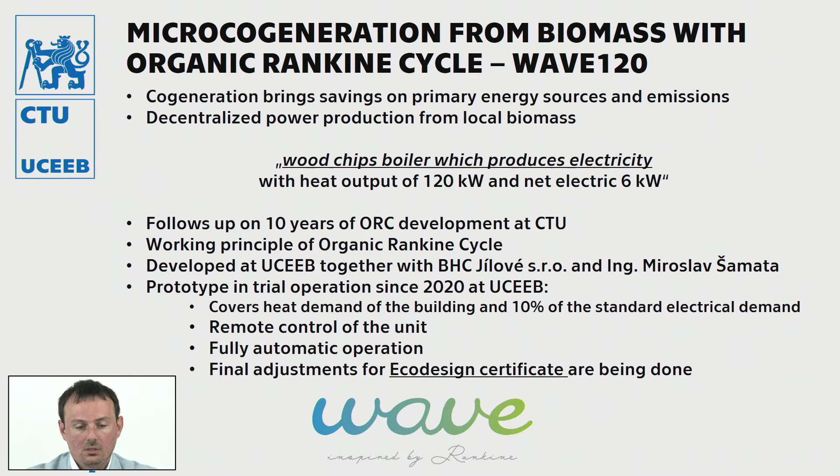What is organic Rankine cycle and why we chose WAVE? Organic Rankine cycle is one of the thermodynamic cycles. It's the way how to transfer the heat into mechanical work, and then transform into electricity. William John Macquorn Rankine was a Scottish engineer. He lived in the 19th century, and he was one of co-founders of thermodynamics as a scientific area. He was also a mathematician, and he was focused on sea wave behavior and description. So we gave the WAVE label to our unit to thank him and to be clear that we were inspired by him.

And the process loop is quite simple. You can see that we put fuel, as I've mentioned we use biomass, into the combustion chamber, and we then use flue gases to heat, to evaporate and superheat our working fluid. Then we transform some specific part of the heat into mechanical energy and then into electricity, and the rest is flowing into the condenser, and we produce heat. After condensation, the working fluid is received and fed back, and the loop is then closed. Cogeneration or combined heat and power production means that these two types of energy are produced together.

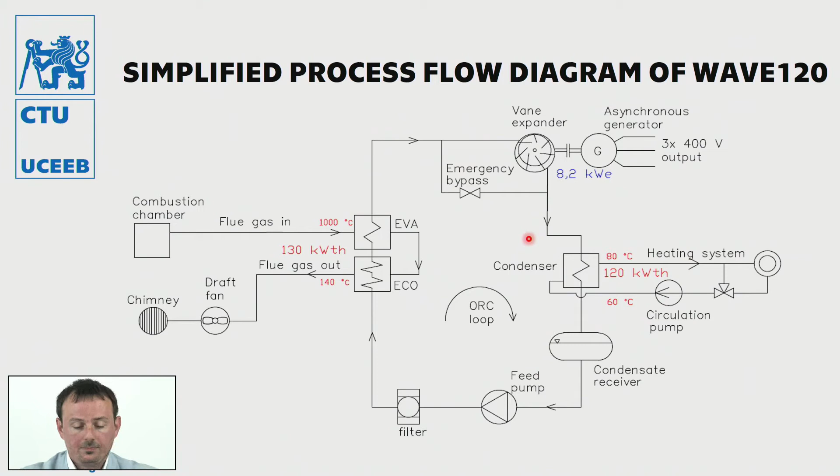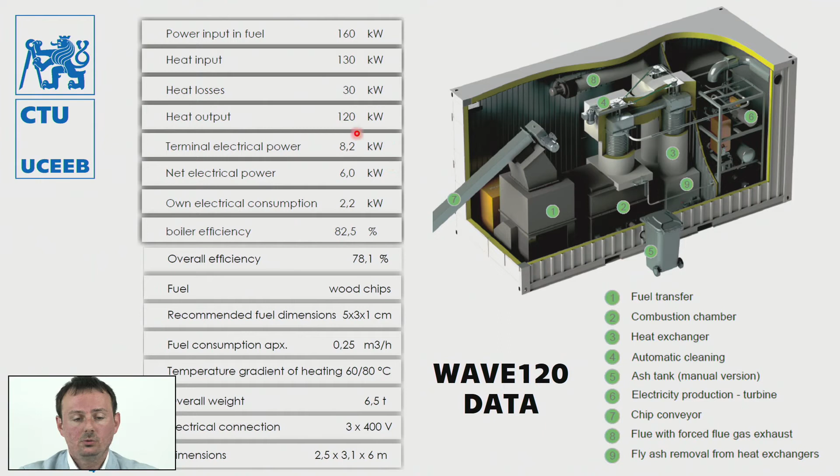Here you can see parameters of the near market unit. The technology is placed into a standard ISO container. On the left side you can see biomass storage and burning chamber and the heat exchangers, and these components are quite comparable to our competitors. But on the right side there is something we call the engine room, and this is the core of the unit where we are able to produce both electricity and heat. So this is the difference between standard technology and what we add to it. When we look at parameters, standard technology has consumption of electricity, and we are producing electricity compared to the competitors. This is possible only with in-house developed components. The core of the unit is electricity generating.

We use a rotary vane expander. I'm very proud of this part of the technology. Václav Hodička, a colleague who is responsible for more than 10 years of research and development in this field, is one of maybe 5 people around the globe who are able to design and operate this type of technology in ORC. And the requirement was to follow simple construction and to be able to achieve nearly maintenance-free operation.

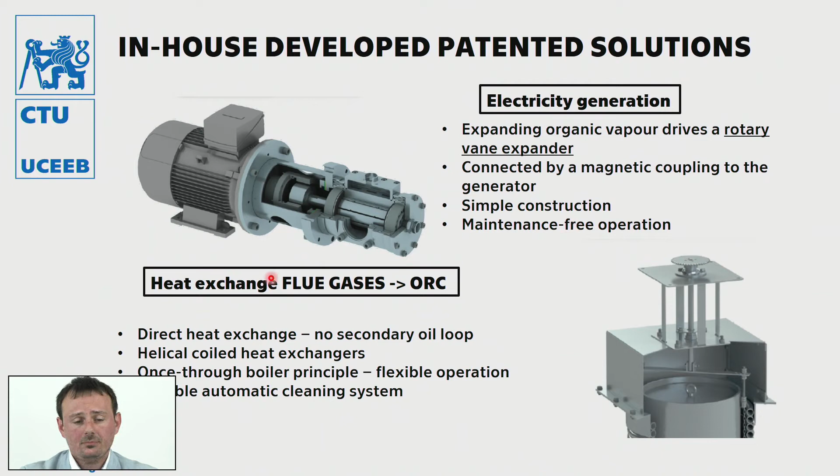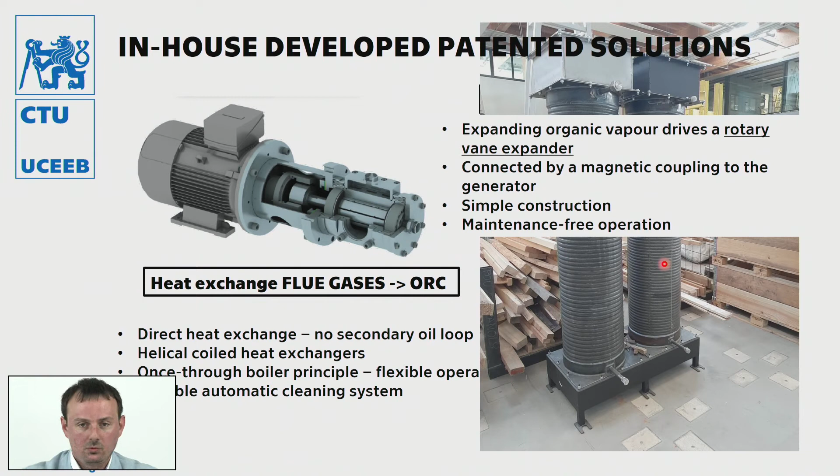In terms of heat exchangers, now you maybe see what those tubes in the UCEEB hall are for, as we can see here on the picture. These tubes are used for transferring heat from flue gases into the working fluid. Specific to our technology, and it's quite extraordinary, is that we use direct heat exchange. Only a few producers around the world are working with this direct transfer from flue gases into the working fluid. Usually they use an oil loop to separate those loops.

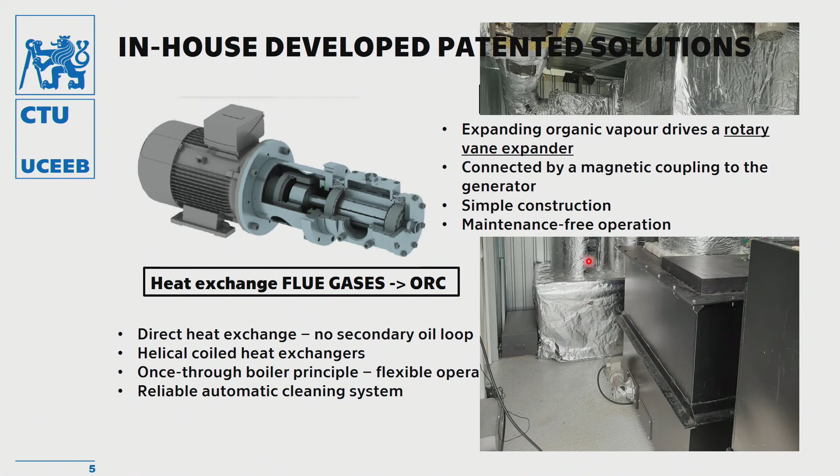Now you can see the picture of the real unit. You can see the combustion chamber and the bottom of the heat exchangers here. Almost all parts of the technology have their own ongoing development projects. In terms of the combustion chamber, the technology is based on 25 years of experience of our business partner, but still we have to improve the technology to achieve new requirements, especially from the air pollution area. And we are improving the technology to be able to use especially low quality biomass. There's a quite strong request from the industry for these types of solutions.

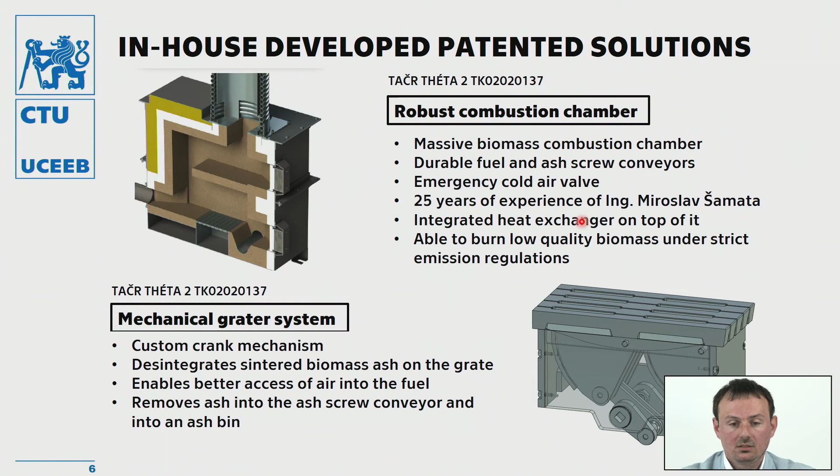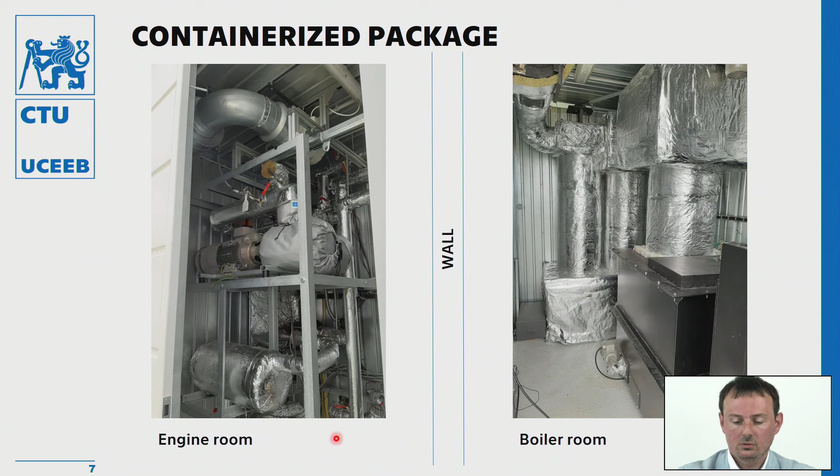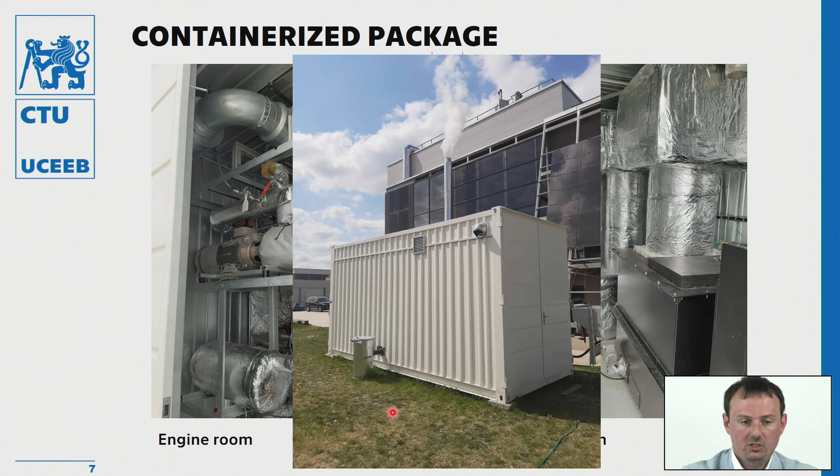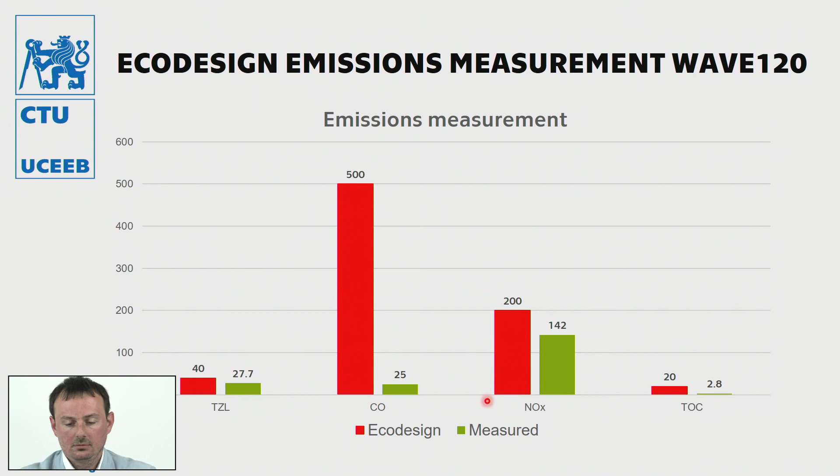To be able to market this type of technology, we have to pass a lot of legislation things. We have to fulfill a lot of requirements. The need is to fulfill something that is labeled eco-design, which is necessary from January of this year to be able to market the technology. Eco-design has two important groups of things to solve. One is emission controlling, and the second is efficiency of the whole unit. As you can see, this picture is from measurement here at UCEEB. So we are very proud that we fulfill these requirements, and we are preparing the technology for total certification these days.

So this project was not working by itself. It is connected with projects around the technology. It took more than 10 years to get to this stage, and for our future, it's important to pass eco-design, to improve lifespan and durability of especially the expander, and we are strongly focused on reducing manufacturing costs to be competitive on the market.